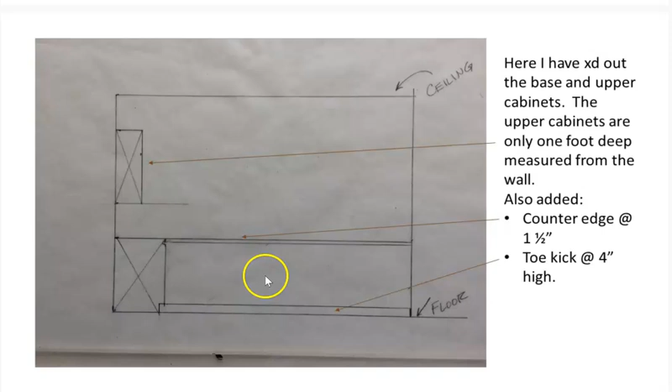Now I'm at the point where I'm adding that side sectional view of the cabinets, and I'm also going to include the 4-inch toe kick. This is so you can rest your foot comfortably underneath the counter and not bang into it all the time. Let's add those components to my drawing, then use our plan as the generator to locate where a window might be.

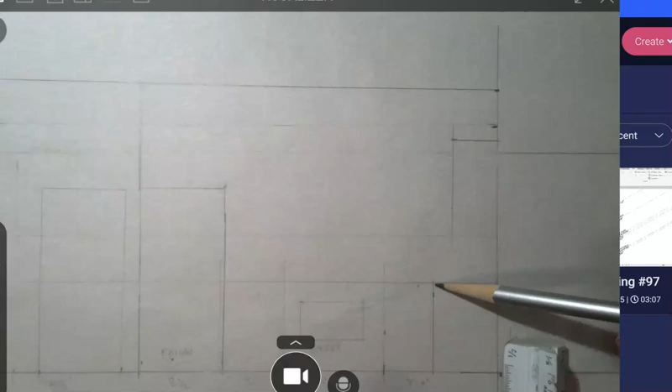I'll include the 4-inch toe kick while I'm here. You can see I've drawn out the base cabinet and also have the upper cabinet. Now I'm going to go for the 4-inch toe kick. I always look for the middle, because then you know that's 6, 5, 4. Half-inch scale is a little tricky to read because there are a lot of increments.

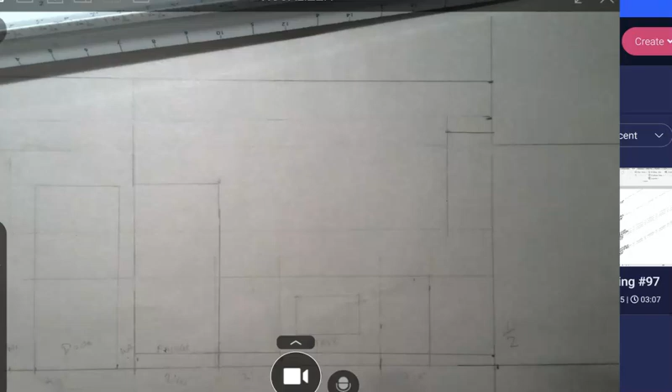But I have a good toe space, and this will carry all the way through—maybe not to the fridge, though it sometimes does have one. I'll carry that all the way through. This is going to be a wall, a door, so it doesn't need it. More wall. But this definitely does. And when we go back and look at further instructions, we can see there's a little indent that's also 4 inches, so we'll go back to our drawing to include that.

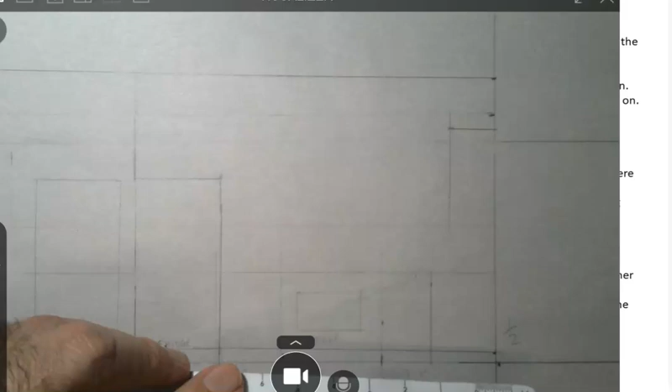Half-inch scale is a little annoying to work with, only because this one is so large. I probably need to cut this in half on a bandsaw so I don't bump into it. I have a short drawing area here. So we have this in—this now is our cabinet.

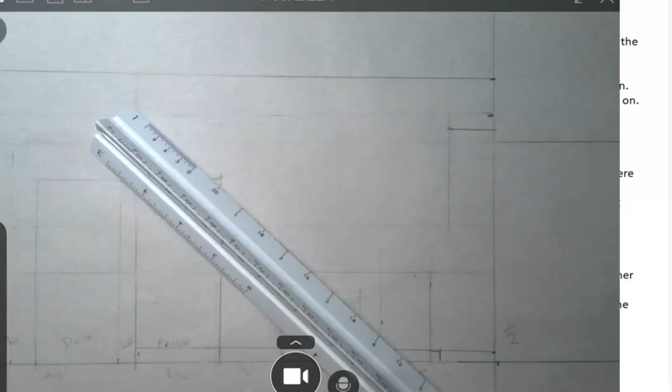So let's signal that it is a section cut and nothing that we should concern ourselves with. We'll do these diagonals from end to end to create our X to show that it's a section cut, or X for section.

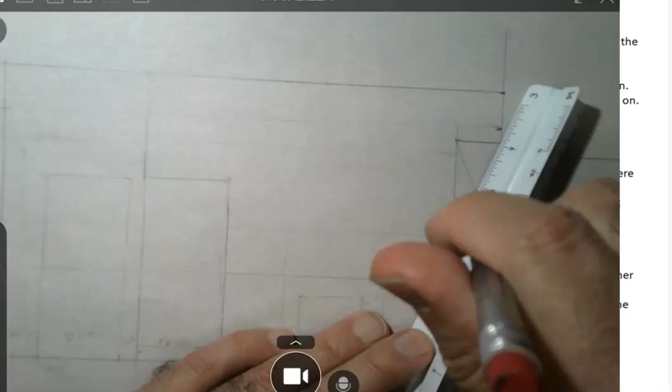There, now we got some nice details. I can see that this is going to be a cab, and this is going to be a cab. From the plan, I can see that I have cabinets flanking both sides, so let's include those.

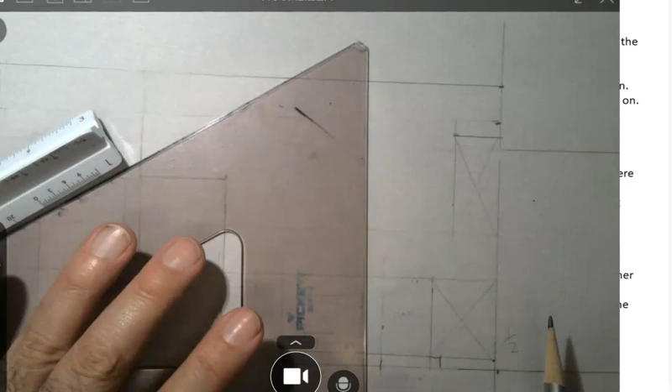And I came up here, I have this 36-inch height, so these are going to be cabinets.

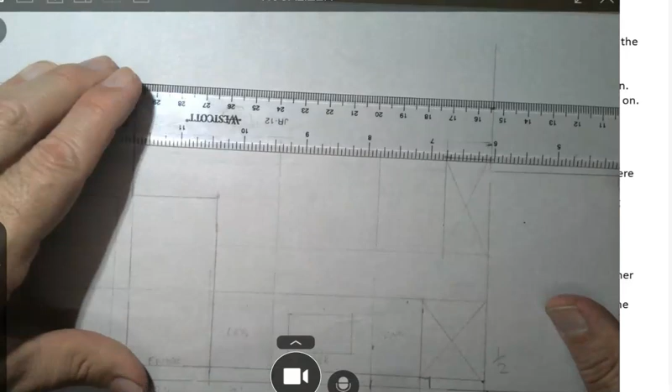Now this is the stove, so there's also going to be a range hood that goes over this. And I'm going to try to put some cabinets above the fridge—it might be too high for convenient use, but let's just put those in here. And I'm going to designate some space for a hood.

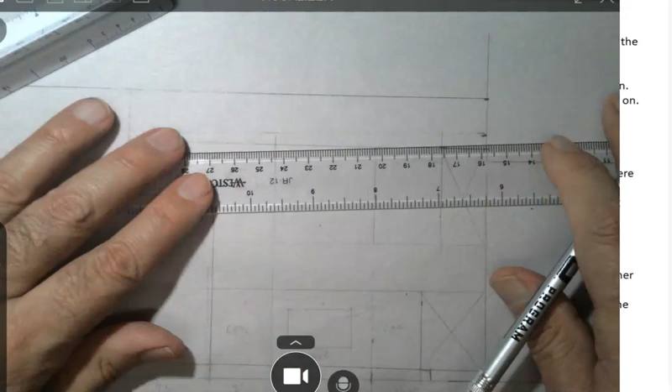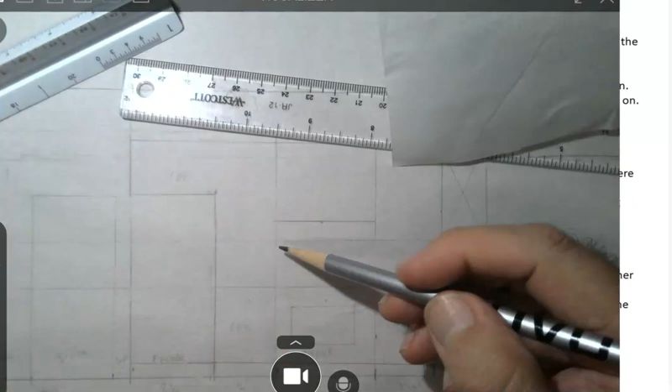They come in different sizes, but I'll go for a 36-inch hood—this is going to catch the fumes. Sometimes I like to leave the range open a little bit more so you have room to move big pots and pans out of the way. Let's get this—so this part's going to take a little stagger and then the hood will start. Let's go look at details.

Okay, so we find ourselves back in the modules. You can see here that there is a 1½-inch countertop, so we can add that into our drawing. Here is some kind of kitchen hood that expands two ways. These might be spice racks, but it's hard to tell right here—we can add those.

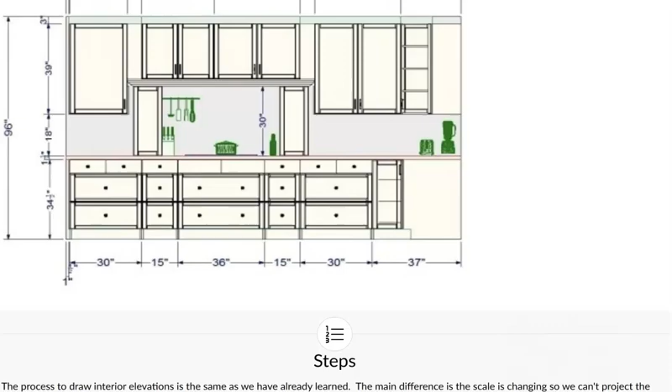Let's check out our plan. Looking at the example that's been put up, we can say, with the space that we have, where are the possibilities where we can divide in half, or where on these cabinets is there only enough room for one cabinet?

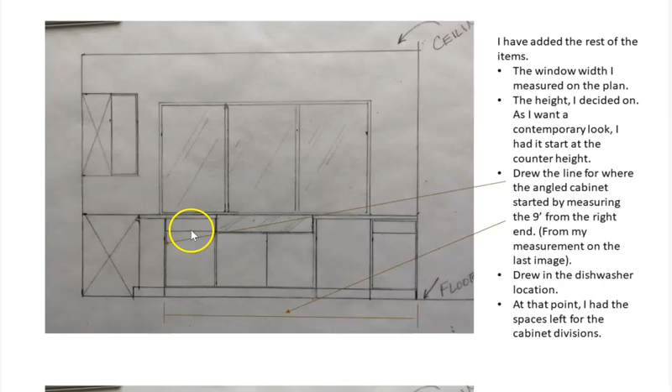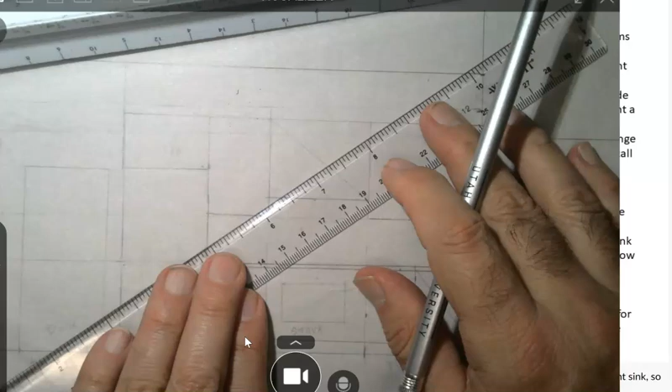So we have our layout here. Let's take a look at what I have going on. Okay, so this I can find the middle, right? One way I can do that is to draw that diagonal from side to side, and that usually reveals the middle for me using some simple geometry.

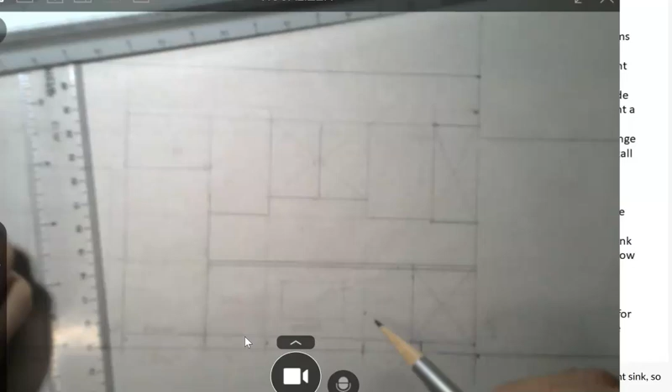So one here—this opens up. This looks like it's going to be a single. Same here, let's see—cabinets, cabinets. Okay, so everything here will be a single, and then this one can probably be a double. So this is above the fridge.

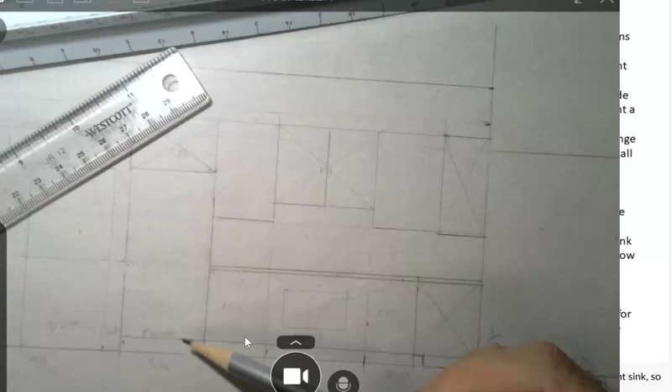And you have to be alert when you're doing this. I got pretty distracted because I kept drawing the line through the fridge. So once you get the fridge established, we'll figure out what the paneling looks like. That's actually more of a separate thing, but I'm pretty happy with what I have here for representing how you make the initial strike into things. I'm going to show you a couple of images to continue with what I opened up with.

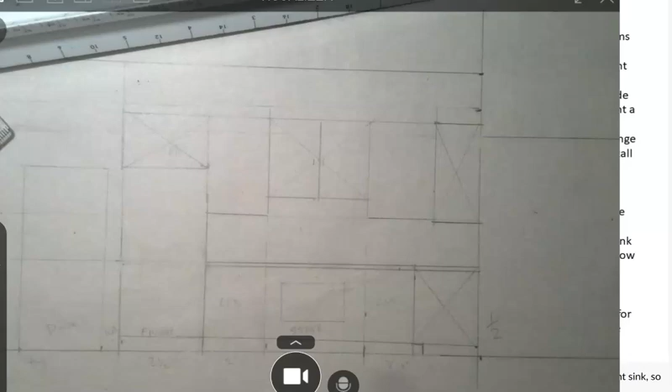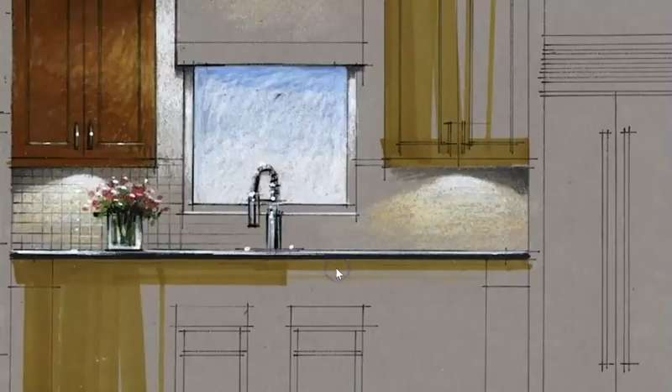I started this module with this interesting drawing taking place on YouTube, but wanted to show you those details in detail—the kind of details you think about later when deciding what kind of cabinets you want, like whether you want trim up top. This first video shows different techniques you could use, and I also have more resources in this module.

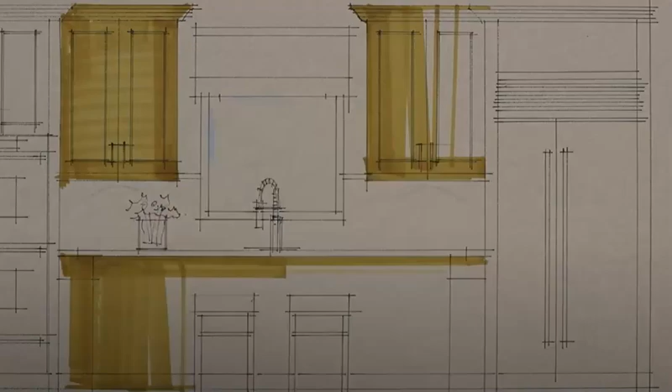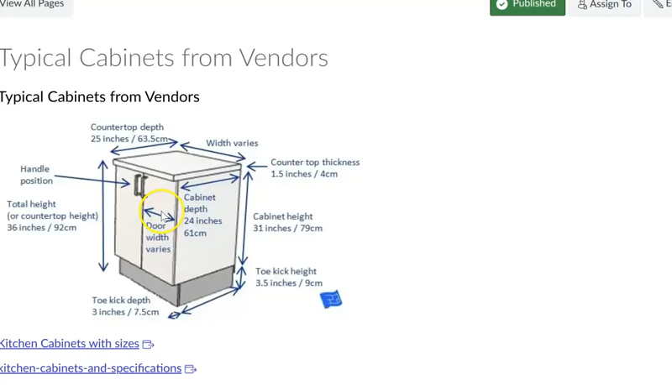You get a lot of cabinets from vendors, and if you look online there are many different styles, but the measurements are pretty much the same. You choose modules based on what you like, find a vendor with the style you like, see what's available, and try to plug in numbers to fit—maybe two 10s or a 20, something like that.

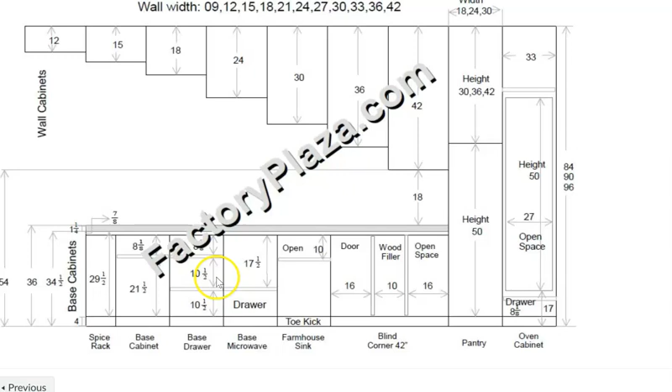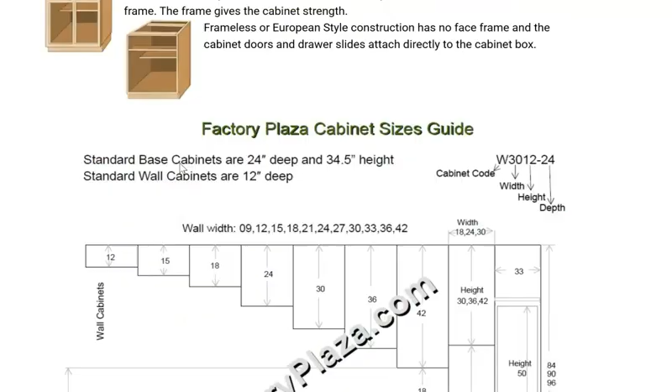Down in the second link there's kitchen cabinets and specifications. Then you have to decide what kind of door type. The one shown from the renderer has a bevel, or you could do a shaker style without the bevel. Then there's recessed panel, which is most typical, and flush, with no trim, just the material speaking. You decide what kind of panel based on the style you're looking for. That's a good start.

Now I want to fill up some remaining time talking about interior elevations, referring to the professional practice of architectural working drawings. Let's go take a look at what I picked out for us.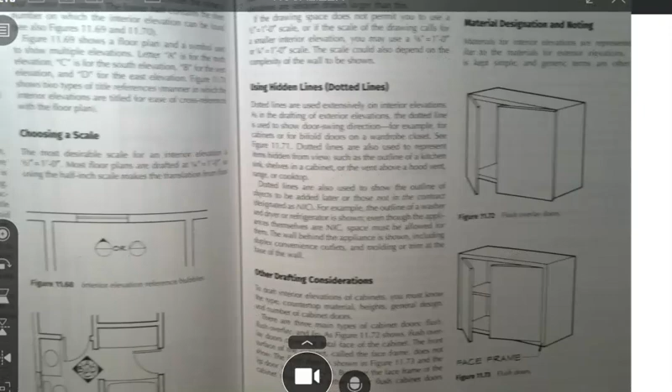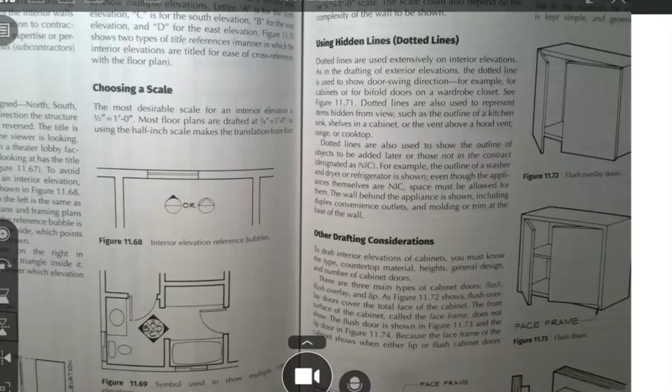We take our elevations from the plan, and each time we do a view, we only take right angle views. You don't want a side angle view because the drawing turns out funny looking since it gets skewed. You can see other drafting considerations here.

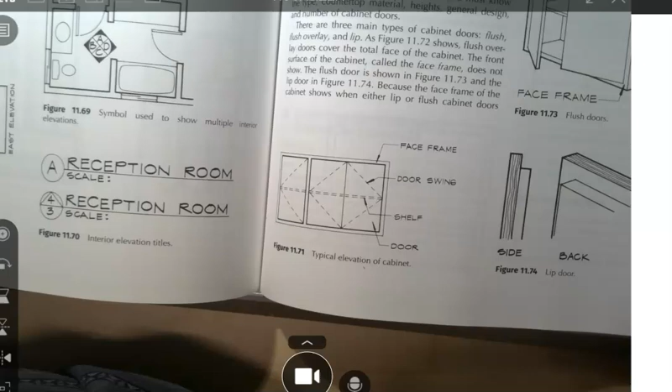If we move in with our scanner, this is what a typical elevation looks like. This is the door, and this symbol shows which way the door swings, and the hatch lines indicate how many shelves—one shelf here, upper and lower, but a taller cabinet might get up to 3 shelves. This one opens this way, and this one from the center, maybe with a handle to do that.

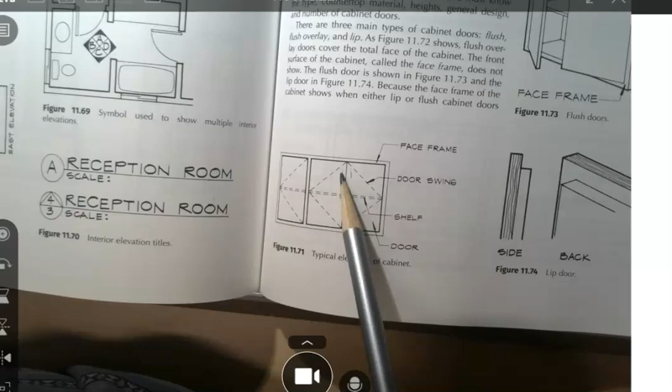A couple of considerations: do you want flush overlay doors, face frame, or backside? Just keep it simple—we'll do a basic one.

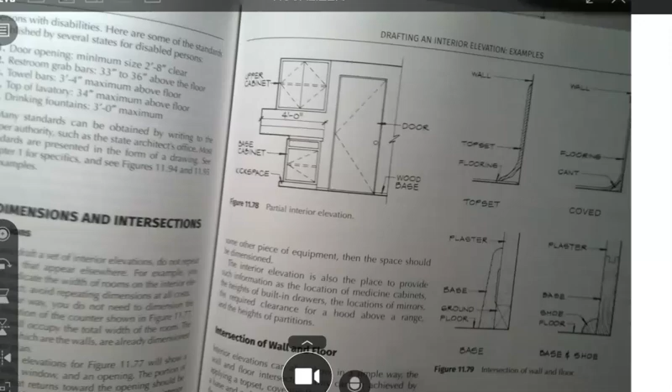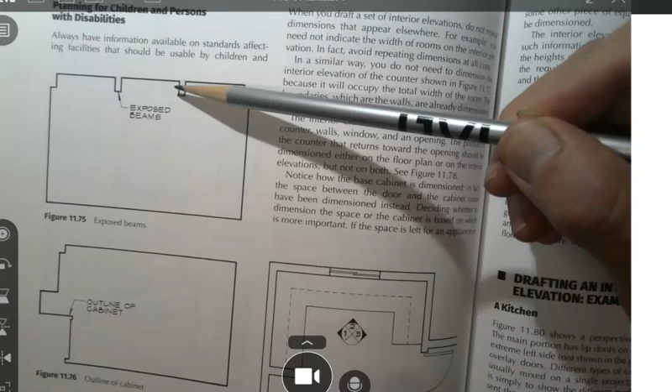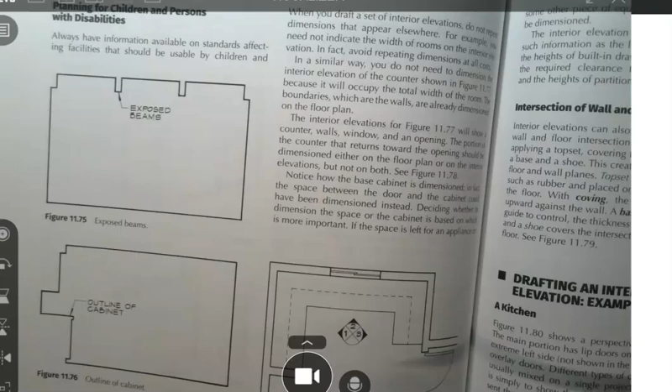Some more things I wanted to show: in some drawings we talked about creating that rectangle frame, though it doesn't have to be a rectangle. But whatever you draw, if something enters into the ceiling space, you need to show that. In some places they leave out the side cabinet and just show the void, so it looks kind of funny, but some people do that and it's legitimate.

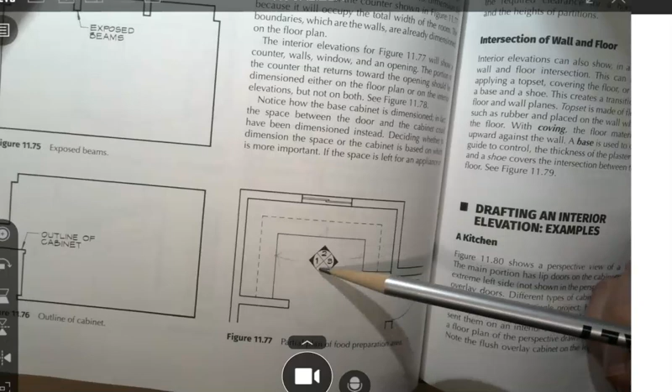This shows each elevation I'm going to look at with my eye—number one, number two, and number three—and then I'll list the page that these separate illustrations are going to be on.

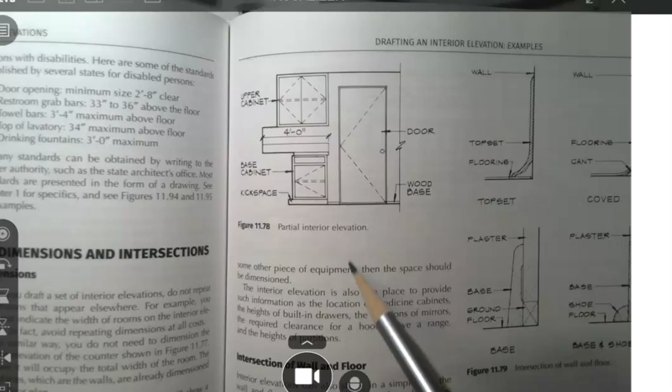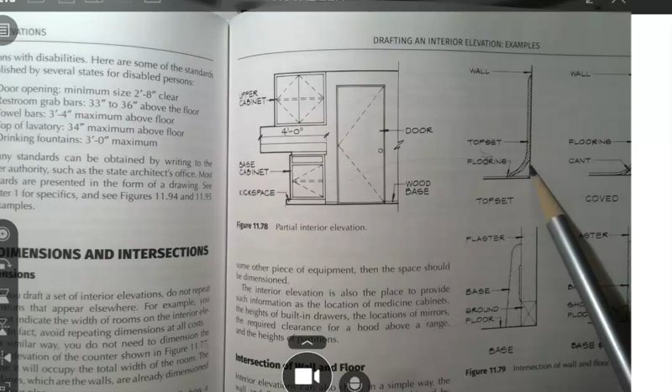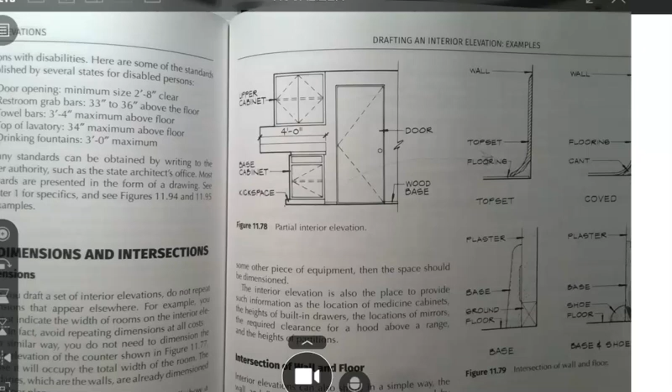So you can use vinyl, or it could be wood, or an upgrade material. Here's an old-fashioned kind of look—you'll see where they use wood to move away from the wall so you can capture dirt. An even simpler version uses a half bevel there.

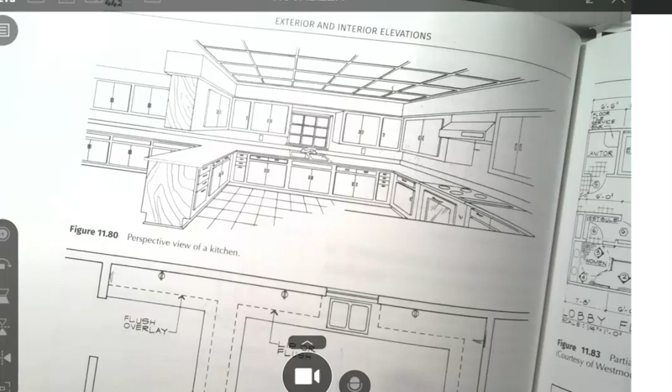We'll end on this grand drawing. Here we have the three kinds of drawings we can obtain: our grand perspective, which is great for visual rendering to show others the idea and concept, and then our floor plan, which shows true dimensions and from which we make our elevations.

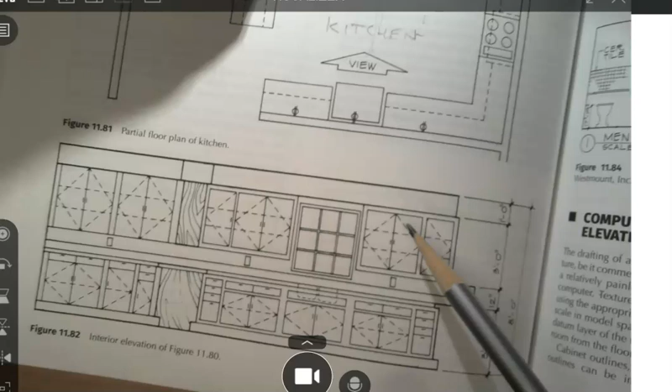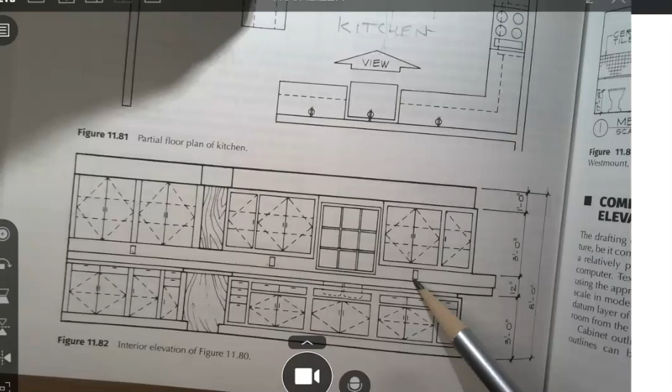We're also going to need to include windows, and to create a full-fledged elevation you need to document all the cabinets in your room, sometimes indicating materials with hatching. You have room for the window, and as you get more advanced we'll talk about electrical sockets next week. This is only a 12-inch space here, so it's not great since it gets pretty thin. They've also shown the pans, how far down they go, and drawers if you want them.

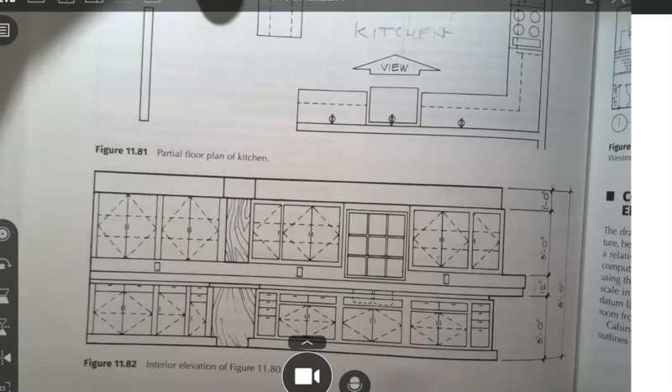That's a pretty good start for interior elevations. Once you've done them for a while, a lot of these things become second nature and it'll be an easy flow. Thanks for tuning in today.